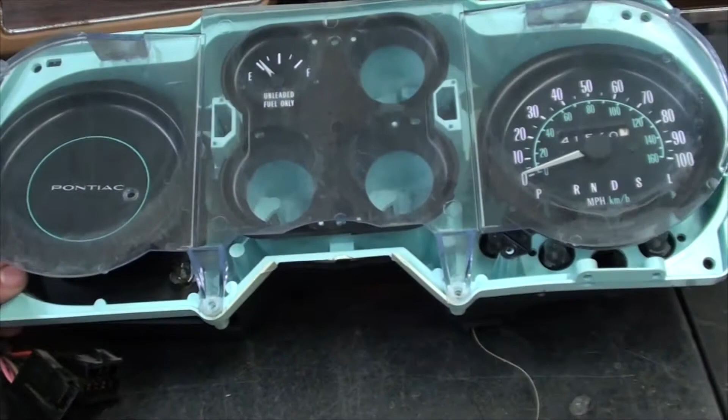Thank you. Thank you for being difficult.

So the speedometer works fine, and I kind of wanted to keep a stock gauge arrangement going on in this thing. I just didn't see, I don't know, I mean I know it's a pile of shit box, but I also didn't want to totally ruin the look of it, because it's a distinct era.

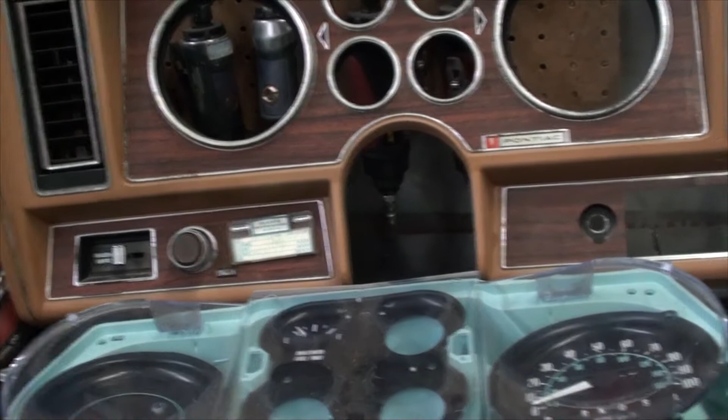So what I came up with was I was kind of hoping to find something that I could fit in here and then make the stock speedometer work, or maybe I could drill it into this guy and set it back here.

And this is 2 1/16, and it's just too big for basically anything. And then this guy's 4-inch, and they really don't make a lot of 4-inch tachometers.

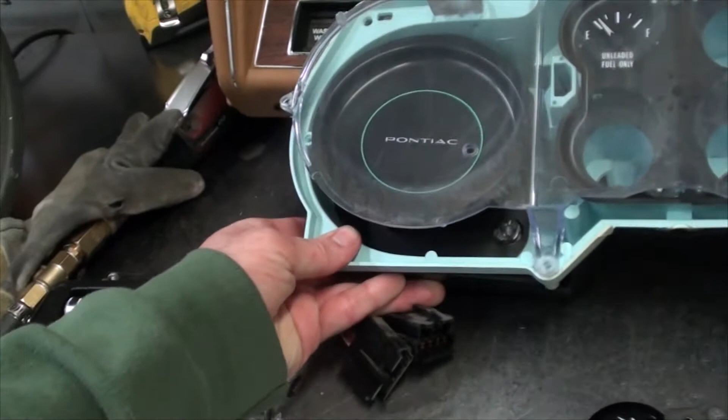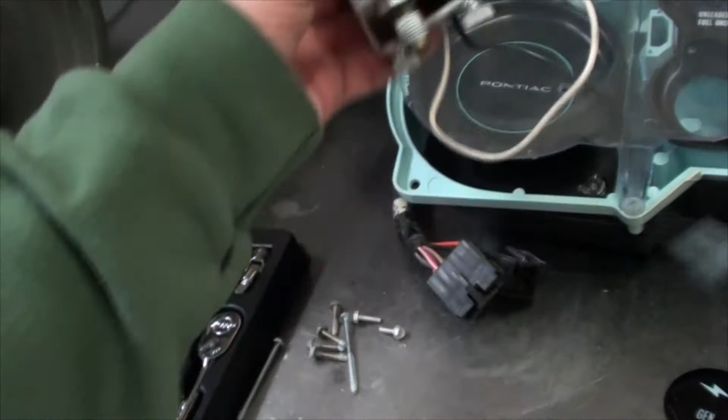So what I'm pretty much got all picked out, and in my inbox at Jegs I found one of these guys. So I'm thinking about drilling out this Pontiac and recessing a tachometer actually into the gauge cluster. So you have at least a tachometer and a speedometer, and the gas works.

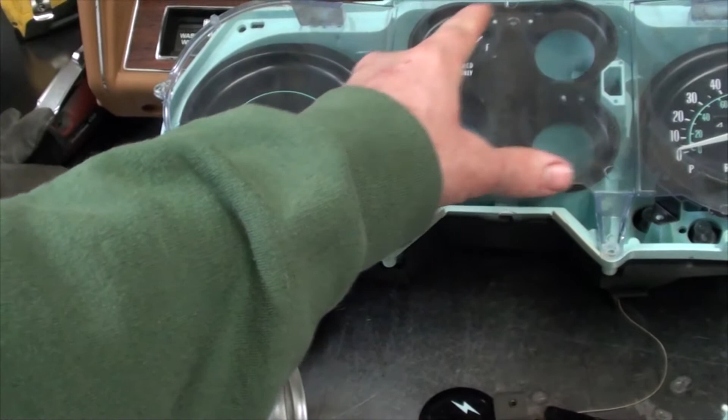So I had 3 gauges left, and these are 1.5 inches. So I found 1.5 inch water temperature, oil pressure, and a PSI gauge, 0 to I think 60. They come in, you can get 15, 60, you can go all the way to 1500, all 1.5 inches.

So I'm thinking if I can maybe get that thing to sit in there, that might be kind of a cool look to have those in there.

Unfortunately, they're all different colors. Once you get down to needing a 1.5 inch gauge, your selection is out the window. You can have these or you cannot have them. So that's where we're at, and hopefully that will work out. I'm pretty sure I'll order those and throw it in there, and that way I'll be able to retain.

I also like having my column shifter little needle thing working, and I would like it all to work because I'm greedy like that. And I think it would look cool to just retain the stock dash.

I got a Racepak gauge cluster that I could maybe 3D print and just snap in there and have all the stuff that I really want and care about on there. But I don't know, I think for a daily driver that's not going to be a crazy horsepower car, and that might be all you need to really monitor, just the engine temperature and the oil pressure.

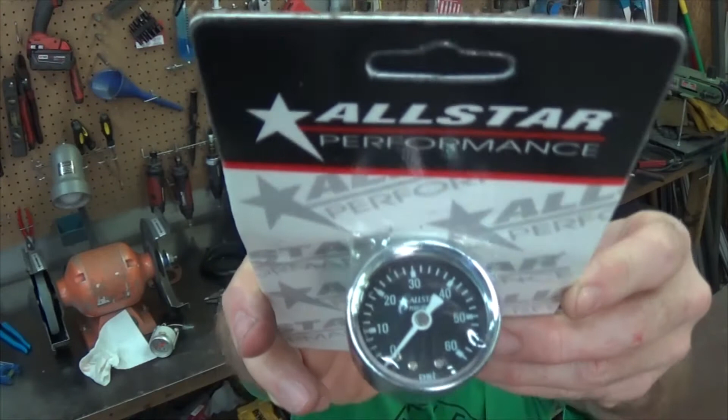So my thought was I could replace this one, this one, and this one, and then over here I got this little boost pressure. It's like a 0 to 60 gauge, a 0 to 60 PSI boost gauge, or just a pressure gauge, but it just has an NPT fitting on the back, and I got a little hose, and I can just run the hose up into there from the manifold, and it will tell me what the boost pressure is.

I bet they make boost gauges that are based off your map sensor nowadays. And I got an oil sensor, so these guys can fit into these gauges. I can leave my stock gas, my stock speedometer in place for now, and then I got this little RPM guy, and I was thinking I can just stick it over here. I wonder if I could fit the RPM and maybe my air fuel right next to each other. I don't know if there's going to be enough room for that. Wow, this guy's little, it's thin. Look at that, this is the AEM. Look how thin that is.

I think what I can do is cut out a piece of aluminum and kind of Dremel out what I don't need of this plastic shielding on the inside, because there's enough room here that these guys can fit. Maybe. Maybe I'm lying to myself, telling myself stories. Ah, damn it.

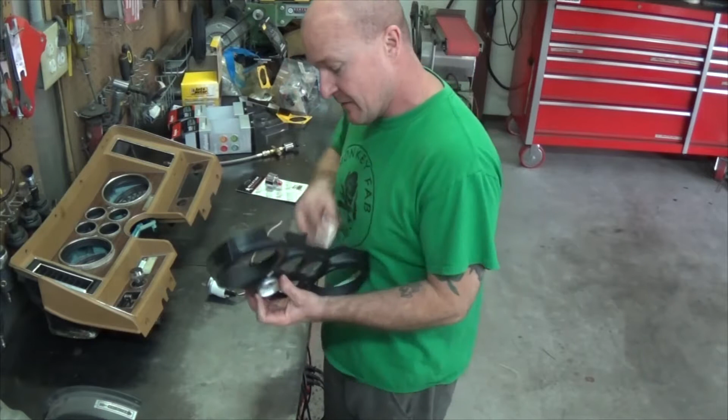So I think water temperature on top, is that the most important, or is it oil pressure? I'll put water temperature on the top. I don't think we have to worry about the order of precedence.

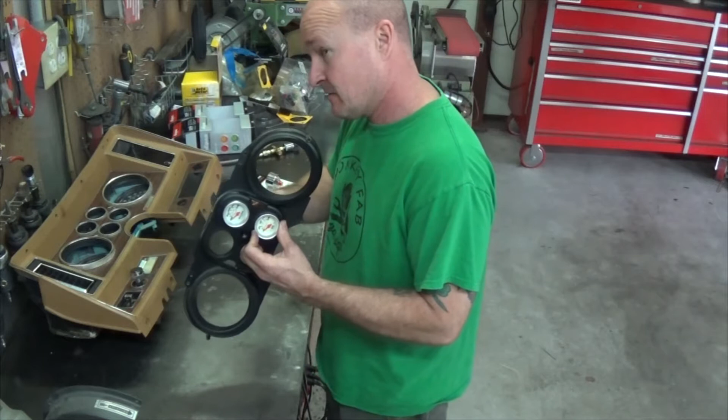Yep, we got PSIs. There is definitely PSIs. I'm getting to the age where I've completely lost my mind.

So here's my fancy idea to hold this guy in place. Damn it. Everything was going so well.

2 inches. So let's see what we got. Trying to make it look nice.

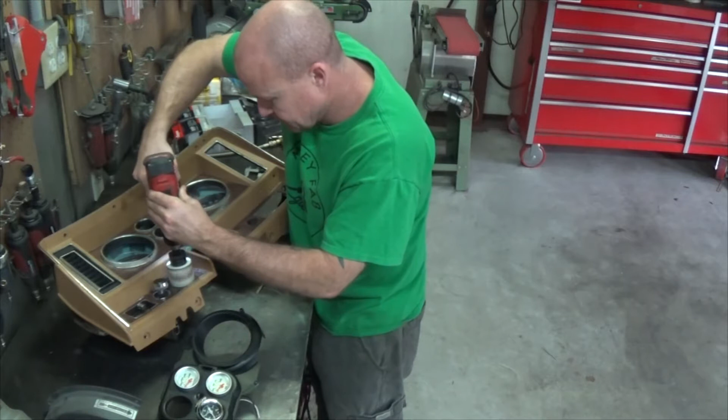Alright, so this guy, we're thinking like here, hey, that looks like it might work. And this, we can fit on, there's a nice good... there's some shit in the way. So there's a little dilly on the back, just gotta get rid of that.

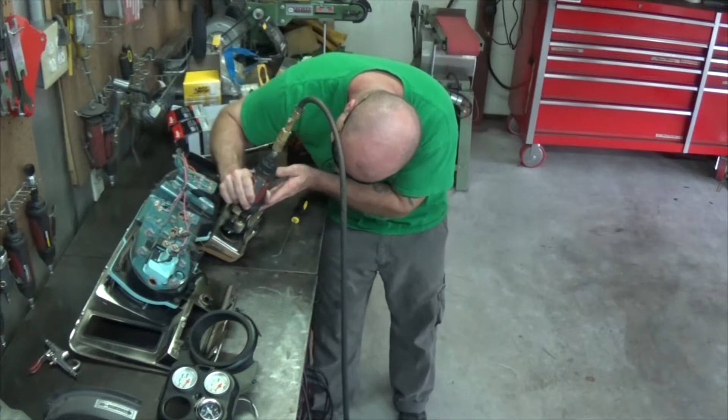Just like arts and crafts. I got some metal on my finger now. It feels great. If it ain't one thing, it's a motherfucking another.

Now we're just gonna... this is an odd little mechanism. This is your... can you see that? Doubt it. Okay, watch. That's your parking selector indicator thingy. And I almost broke the dash. I felt it go crack.

Okay, so we are gonna take this guy apart so we can see if this will fit the way this is, which I think it looks like it will. And then if that works, what we're going to do is figure out how to get the air fuel and the tachometer over here and see what we got to do. See what the haps is on the rest of this stuff.

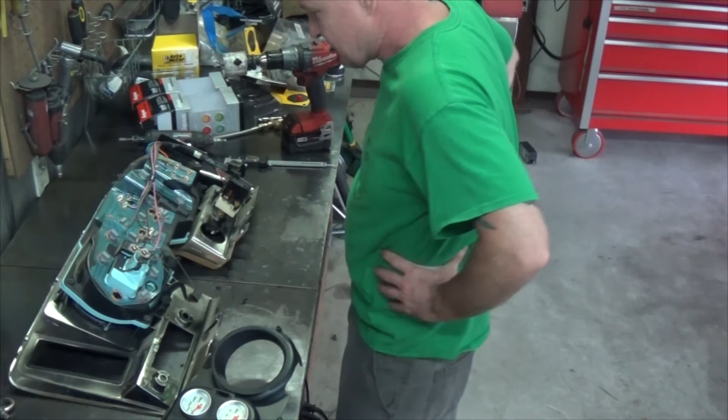It looks like I got power lines, but I'm not really sure how they're powered, if it's just all powered. I see a red wire. It would be nice if we can just tie the wires right into the main loom here.

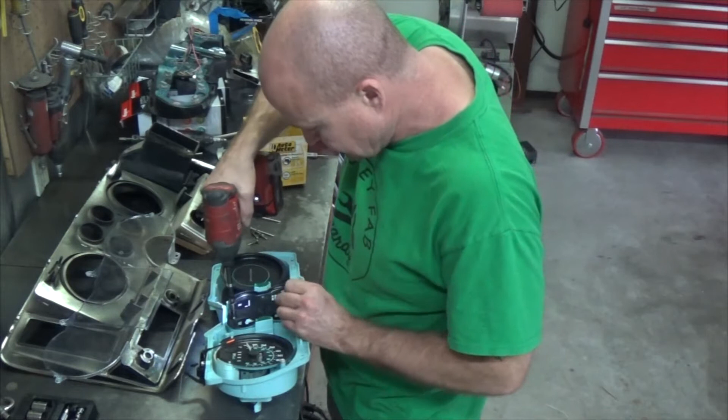How fucking sweet is that, man? That's like... I feel like one of those Mexican soccer players.

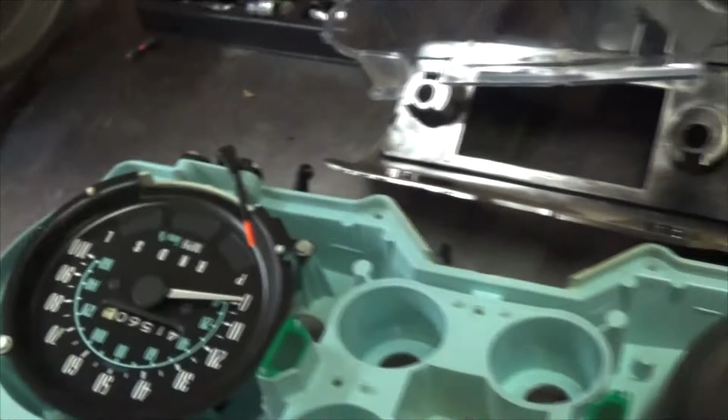Goal! So hopefully this will just drop in there and I won't have to fuss with anything. Like a Mexican soccer player. Whoops, got upside down. Please just fit.

Turn signal indicators are falling all over the place. We'll just take them out for right now, and we'll do this. There, back into there, just fit. Just be nice, just work with me a little bit. I've been trying to bring you back to life.

Fit, no fit. Does it fit? Fit, no fit.

It's hitting on these stupid screw covers. I was thinking if I could just trim these down. Oh, well that makes perfect sense. We'll throw them at the very bottom. Okay, well, whatever.

Because I really don't need any of that, so I think I'm just gonna obliterate it. I'm gonna kill it. That's what I'm gonna do. Which instrument of death do we want to use? Probably one that's not gonna hurt us too bad.

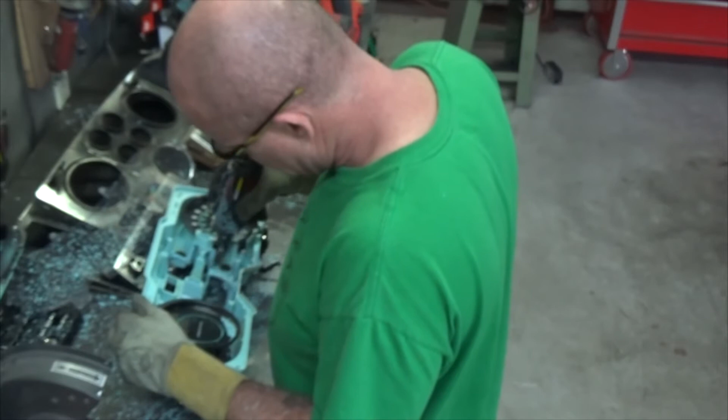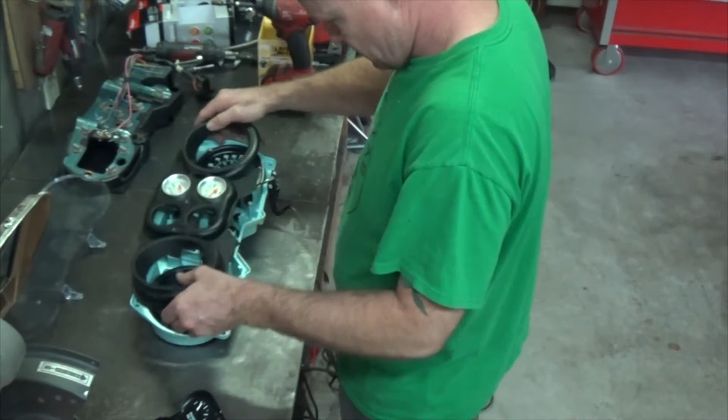Let's try it. Let's give it a shot now.

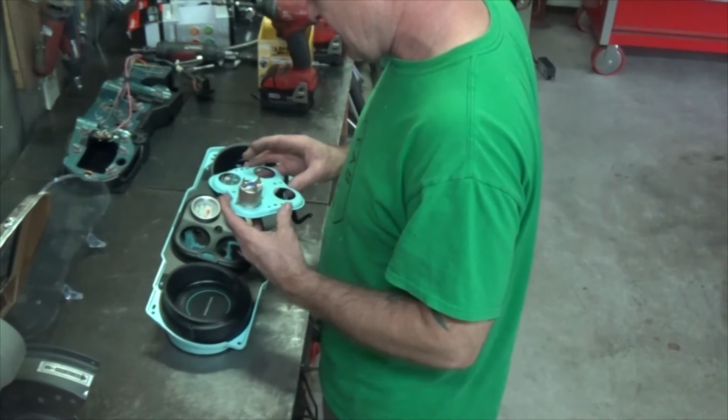Alright, so we just need to figure out how to get the gas gauge in. So there's 2 points for it, so that should keep it in there, if I can. You got that too, huh? I'll get it there.

So, alright, so we just gotta cut this here so we have room for our gauges. So I think I'm gonna just try to wing it like this. We'll see, we'll see what happens. Thick bandsaw.

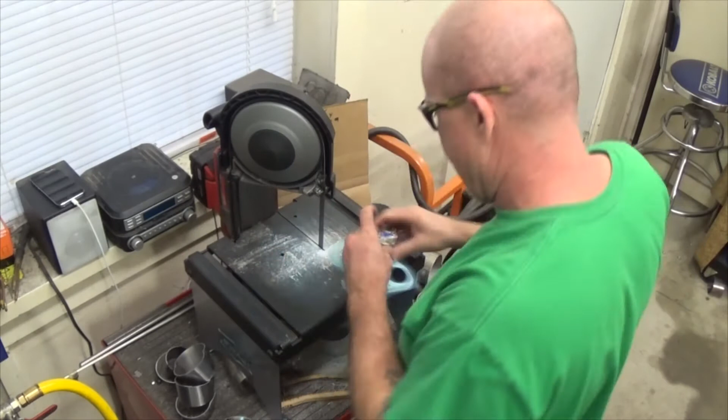Bottom. Yeah, so just put one in there. Who cares? Right? Right, this guy.

Why did he put wires on gauges? Alright, man, it's not exactly OEM, but it's not shit. It's not complete shit either.

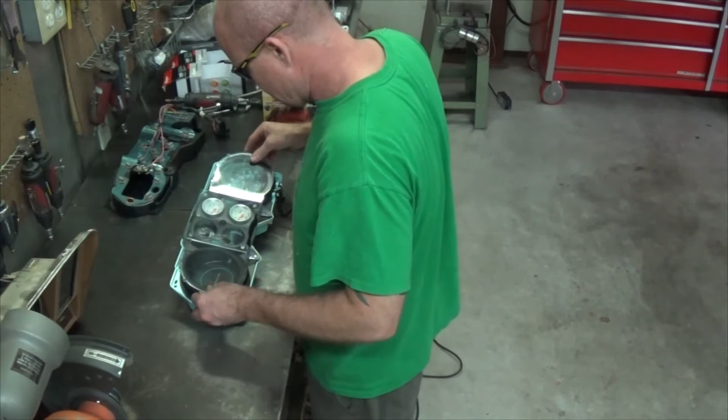It's gonna work, boys. It's gonna work. Oh yeah, that'll work, yeah. Okay, cool, alright, so I didn't totally fuck us.

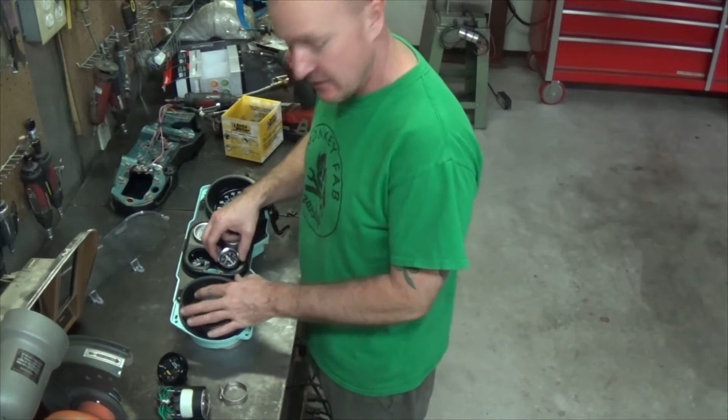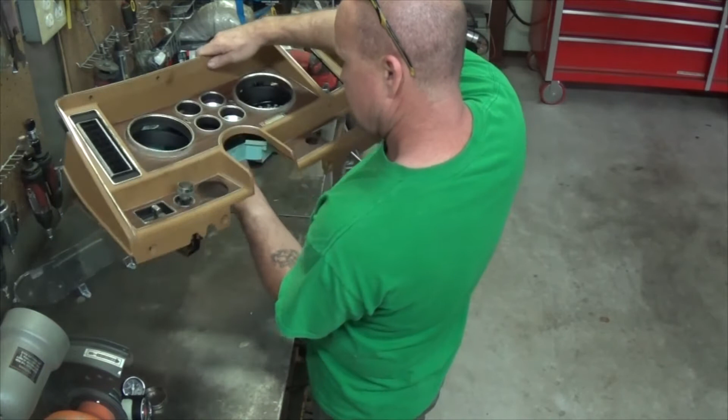What we'll do is make a little aluminum bezel that goes around here, and this will fit into. The same thing we're doing over here. And when this dash drops on top of it, it looks like these guys are going to kind of cover that up anyway. So, to a certain extent, it doesn't really... nothing really matters.

Nothing really matters to me.

Okay, so we just gotta measure this shit out.

Yeah, like this, I think like that. Swap them over. This has select and mode, that way we'll still have access to those buttons. And yeah, we'll figure it out. We will figure it out.

So I'm gonna make a circle. I need to know how big of a circle I need to make, and I'll write it down, that way I won't have to measure it 6 times because I forgot.

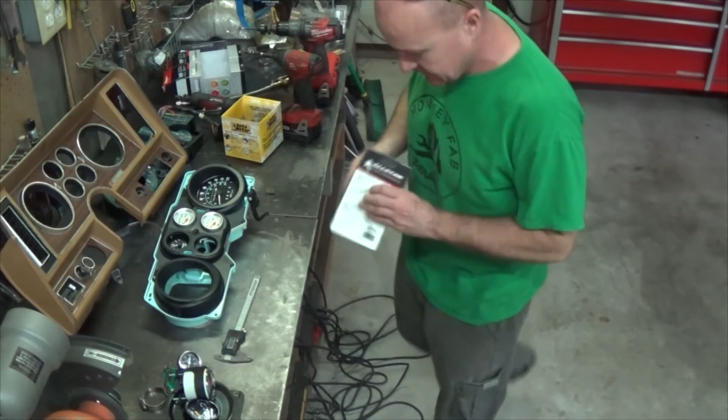So this is PSI, and this we'll call tach.

So we're going to say 1.6... 1.600 thou ID, and then the OD we're going to make so it will sit on top of, now 2 inches, 2.00 OD. Alright.

And then on these guys, I think we'll just set it up kind of 45 like this. And that should, there's nothing in there, so it should work. I don't know, I think this is just plastic, so we should be able to carve that out pretty easily. We just need to know what this is.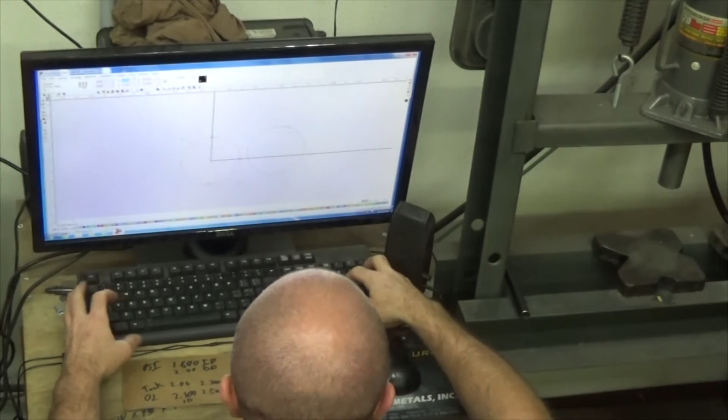Let's call it 5 inches on a 5-inch ring. We will choose a circle and put it here, then do a copy and paste, and get the sizing right. So the inside is 1.600, and the outside is going to be 2.00, or 2 inches.

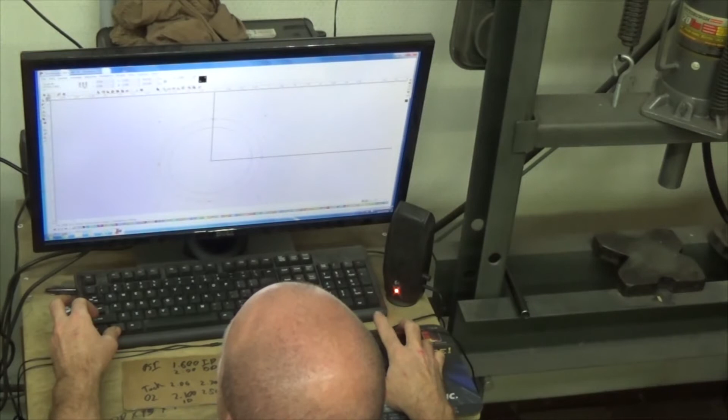So that's great, we'll add some tool paths to this. We'll make this one a mill tool path, and see my lead-ins at 45 - let's do a little more lead-in than that. Okay, that's good. And then this guy we'll make a female tool path, and give ourselves a little more lead-in - that's fine. We'll hit OK, and then we've got to get rid of our geometry.

We're left with tool paths. We've got to sequence these, make sure they're sequenced correctly - that is first and that is last. That will work, and then we just export. Where the hell do I export these things to? Let's go.

Block off plates - sure, we'll call it block off plate. We'll say the 2-inch, PSI, and save.

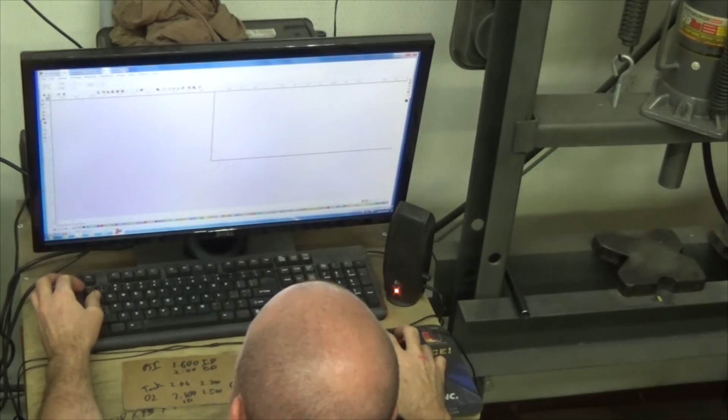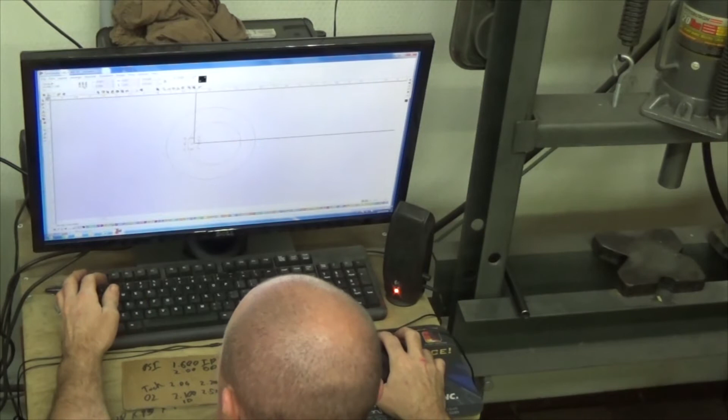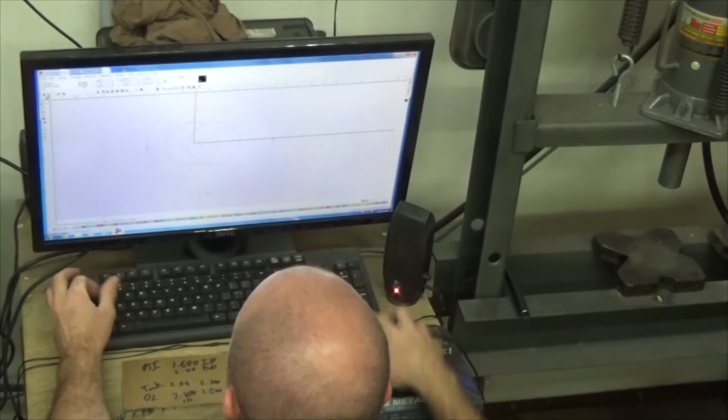Okay, so that one's good. The next one we'll just reuse this and open up some more geometry, and that should be good. Hit OK - whoops, don't need you, little circle. So our O2 needs to be 2.1, so we'll make this 2.100, and this needs to be 206, so 2.06, great. And then this guy is going to be 5 inches. Why are we having such a difficult time today, Mike? 5, enter. Okay, so now we just got to nest this stuff up.

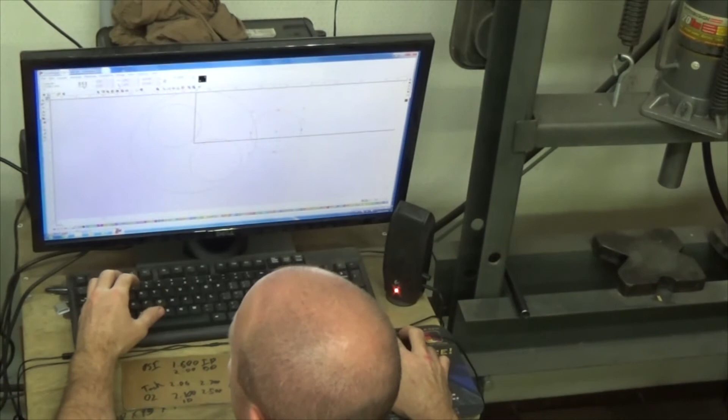Actually, what I need to do - let me just do this real quick. This is my O2, this is my tach. What I wanted to do was control-copy, control-paste, and let's make the outside of the tach 2300, so we'll say 2.3, and we'll make another one - this was 2500, so we'll change this to 2.5. And then what I need to do is nest these guys together, because this is the inside.

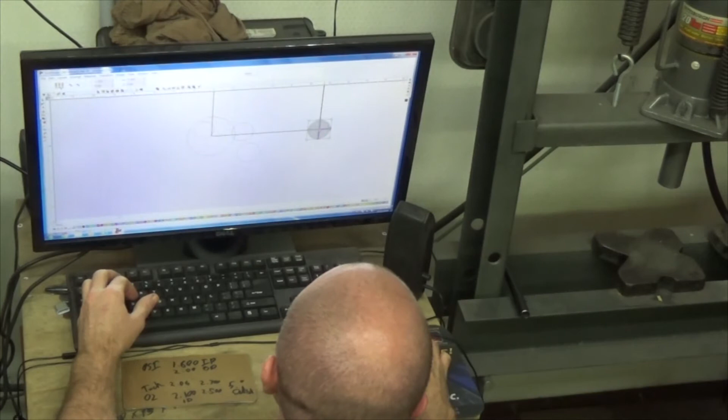That's the actual cut I need to make, but this includes the bezel area. So we'll just group those to keep it simple. I'll throw that there. And then this is the outside of the tachometer and the inside - so we need to actually cut the hole on the inside, but we need to account for the material on the outside so we don't bump into each other. And then we need to keep them nested towards the center.

Oh, you know what, I was going to do the tachometer on top - that's right, because it has little buttons. So let's switch this up, put this down here, put this up here.

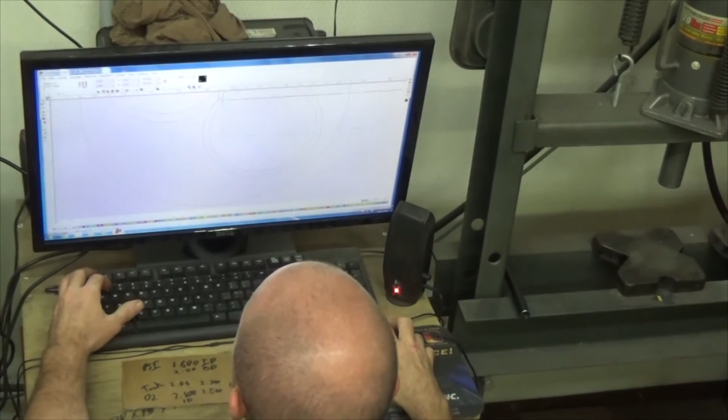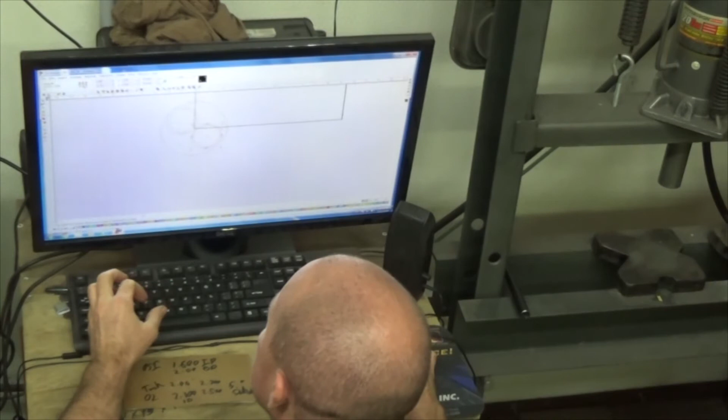See, right here we're hitting, and we're outside of our circle as well. So let's just move stuff around a little bit, see what we can do. And that is not horrible - it's not horrible. So we don't need these guys, so we'll get rid of those. Let's ungroup them, you two. And then we can get rid of these guys, bye and bye - and there we go. So that's what we're going to cut out on our drill.

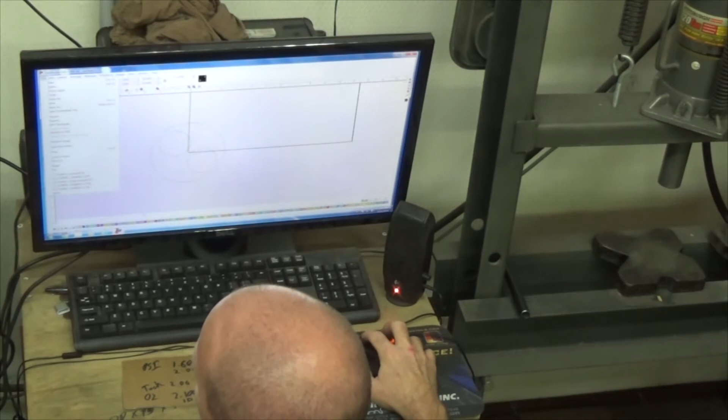I should scribe something on there - like, should I do a monkey? I think like a little Monkey Farm on the dash would be cool. That'd be kind of cool. I think it'd be cool. Let's do that. Let's go file, open.

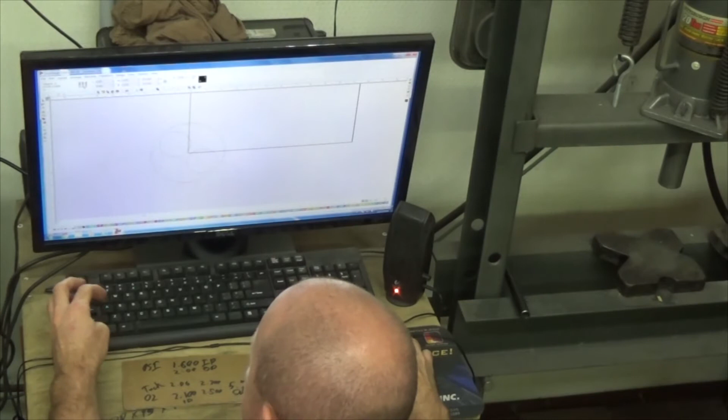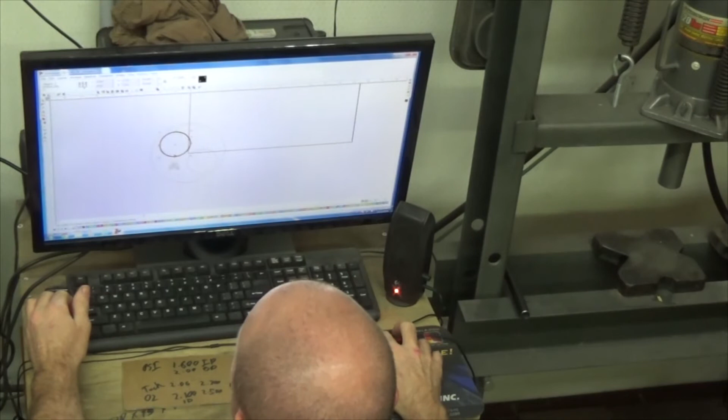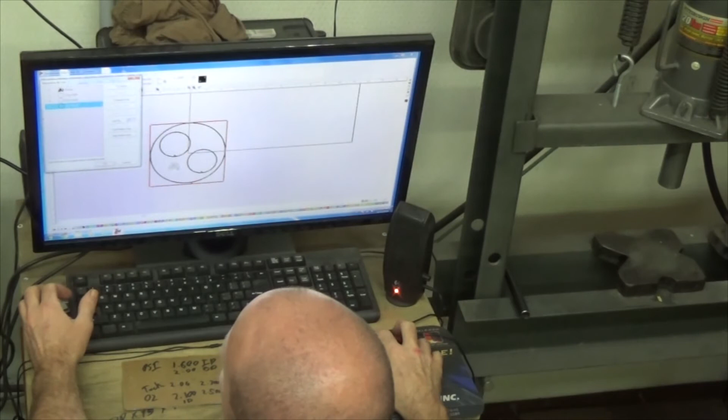Cool, so we'll add these toolpaths. We'll make this a female, we'll make this a female, and we'll make this one a male. And then we've got to get rid of our geometry, and then we've got to sequence it. Sequence by list - let's make that first. Okay, great. And file, export.

It sounds much nicer in person, I assure you. I assure you, it's so pleasant.

Alright, and cut it, okay, and start - do plasma cutter, thanks.

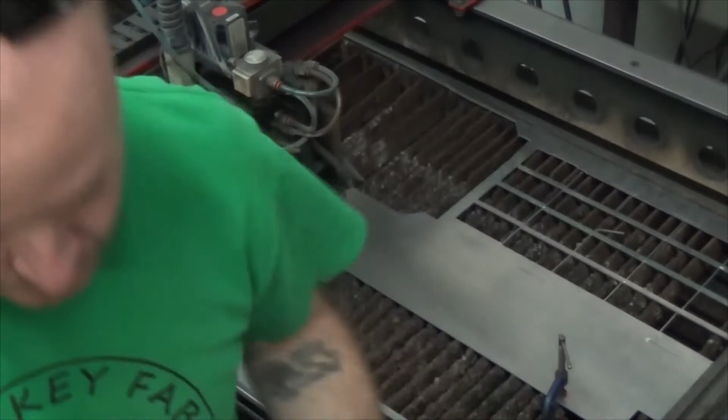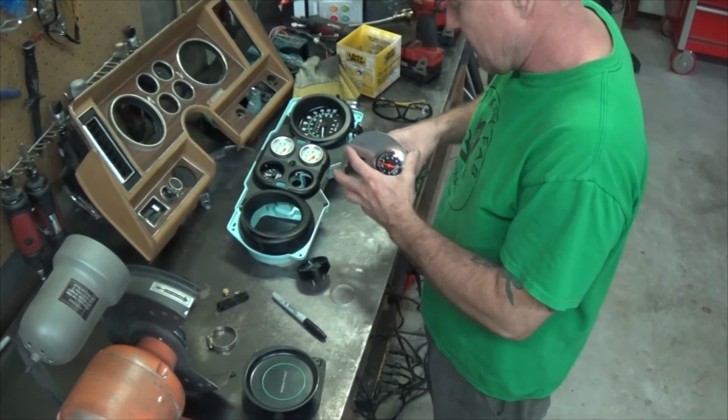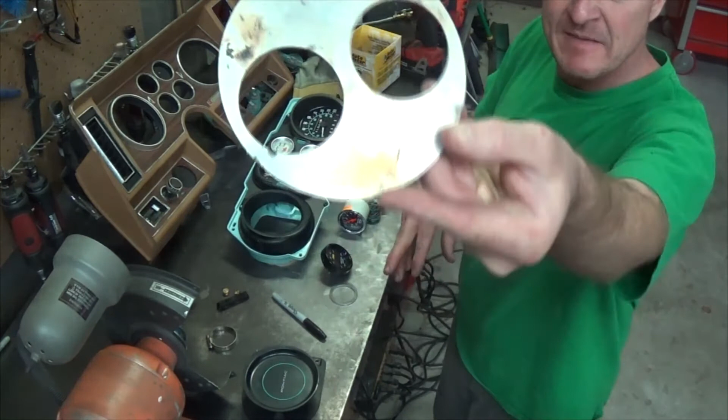Pretty cool - what they claim to cut, what do you call it, the tolerance - the tolerance is always off just a hair. So that guy will probably not be a big problem to fit at all, and that guy's going right in too, so that's good. And what we'll do is, whenever you plasma cut it always makes kind of a disgusting mess, so we'll just clean this thing up a bit, and we'll cleanse this guy out a little bit, and clean it up and paint it, so it kind of matches the same black motif that's going on.

Right around - now what I do have to do is figure out how I'm going to hold this guy in here, and I'm hoping that this plastic cover over the top will just kind of mash it down.

Yeah, I think so. So what I can probably get away with is just gluing this thing onto there and putting that cover there to kind of hold it down, and we'll make it happen.

It's been hours, probably 4 or 5 hours now, I'm guessing, since I last had this camera on, and this is kind of where I'm at present.

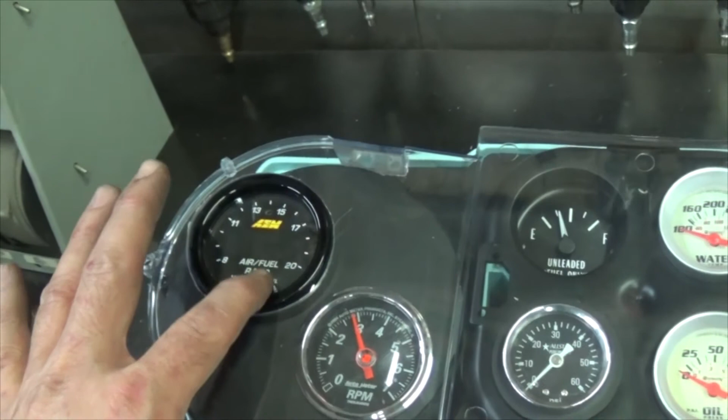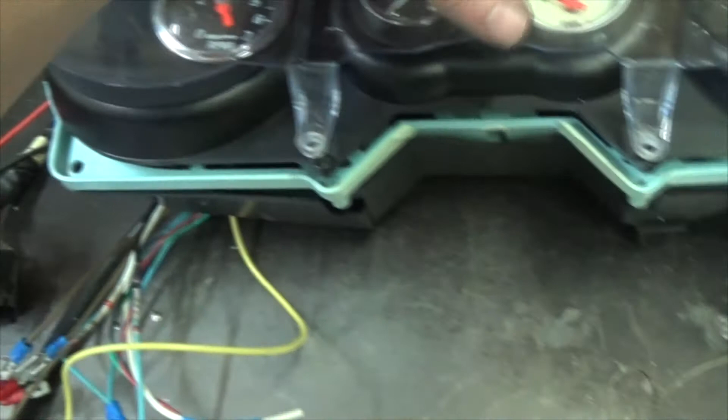We got all the gauges situated in the stock gauge pod the best we could. This one ended up sticking out a lot farther than I intended, which is fine because it has little buttons on it. I don't know what the hell they do. I cut it out with the hole saw, then did some clearancing with the aluminum tipped die grinder, and it fits okay. It's not perfect, but it's gonna work.

I got all the wires ran for the most part. One problem I'm running into is the air fuel plug. There are just two plugs in the back, and I don't want to cut the loom halfway down and splice it all together. I'd rather just plug it together. So I'm wondering how I'm going to do it. I have to assemble this whole thing, and I wonder if I can get it assembled in the car, plug that in, and then do the rest.

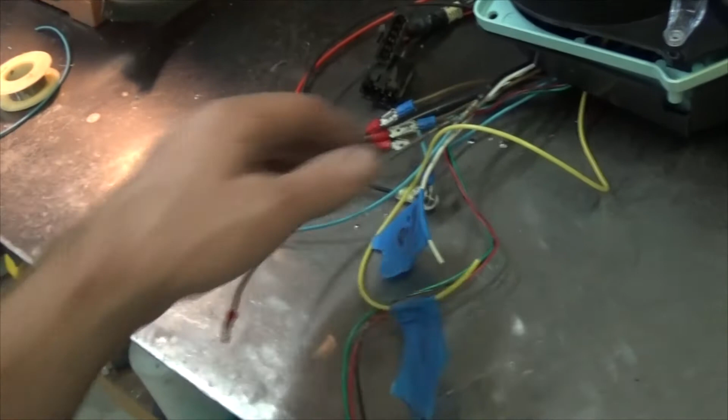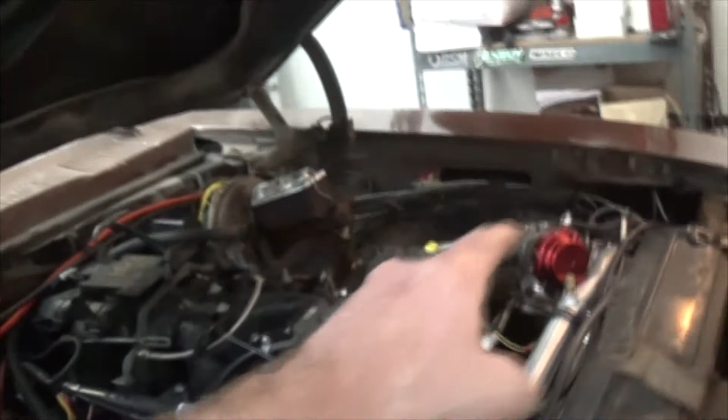Most of the wires for all the other stuff are out, and that's not too bad. I got that sorted, and I got the little boost hose guy, and I ran all the wires to all the sensors, the temperature sensor, the oil pressure sensor down the fender. I ran the hose for the throttle body for the boost gauge and for the blow-off valve, and I ran the wiring for the fuel pressure sensor.

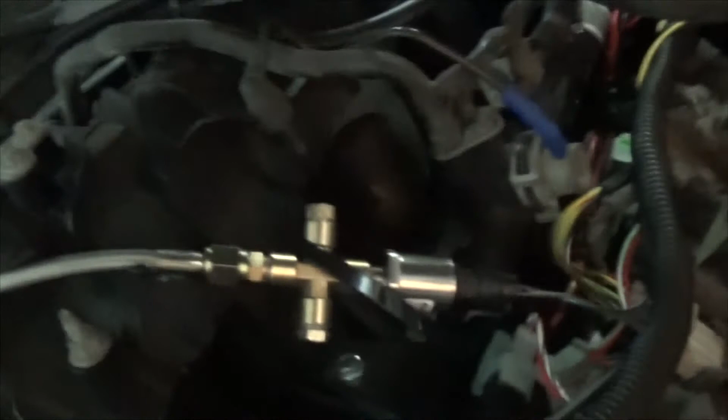I found an AN4 line that I had laying around, took the Schrader valve out of that, and found this really goofy T-fitting that worked. I plugged the two ends I didn't need, ran it around and zip tied it, and ran that into there. And then the air fuel gauge.

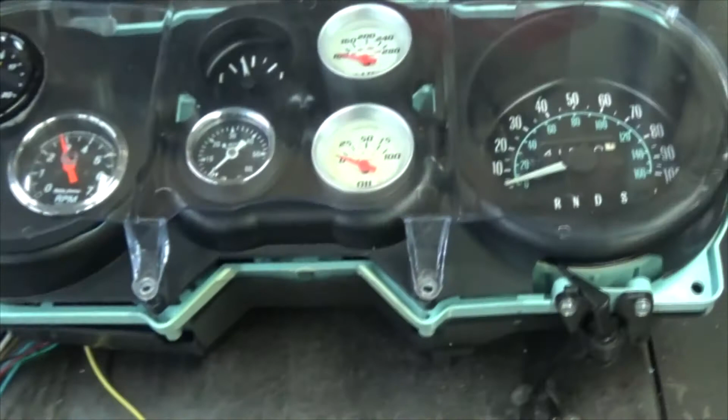So I should have a pretty good complement of gauges. I think I went from having basically a speedometer, an odometer, and a gas gauge. The inside of the car is just an absolute disaster, and my light's dead, but it's just a pile of wires down there, not really fun. But I went from having just a speedometer and a gas gauge to now having coolant, oil, boost, air fuel, the tach, and I'll also have a fuel pressure gauge. I think that covers most of the gauges I like to see.

So I'll be pretty happy with that. It's a little wonky, but not horrible. I could have done a lot worse. So that's where I'm at. It's late, I'm tired, and I'm gonna call it a night. This is the current situation.

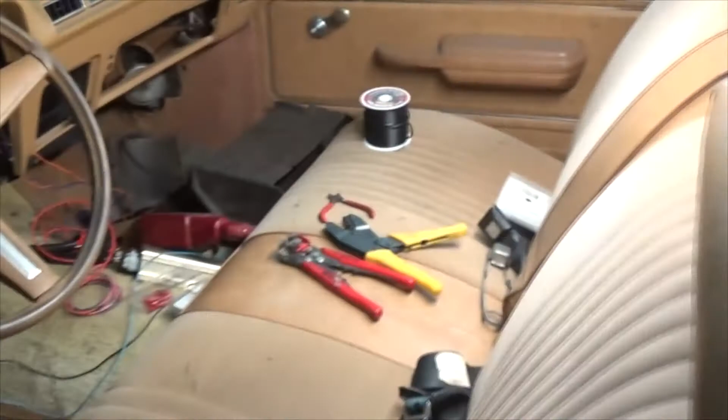We got all the sensors ran through the firewall, and all the harnesses kind of pre-staged where I need them to be.

I bought a 6 fuse block and ran it to my switch with 10 gauge wire, so now I can use that to run a few different things. I'm going to use it for my fuel pump, I'll have a remote fuel pump shut off, the computer, and then all the gauges of course. So it's a bit spaghetti-ish.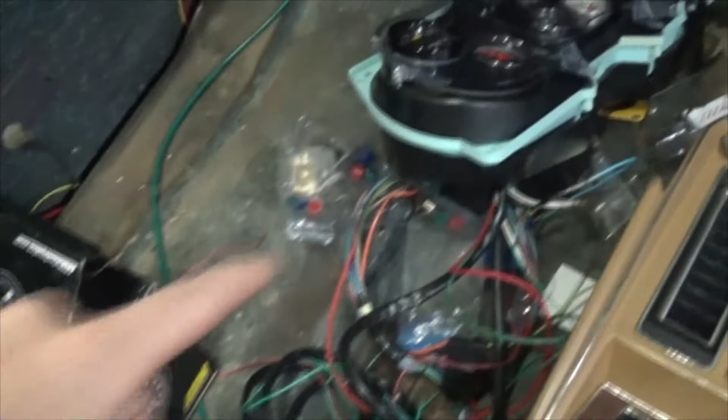But what are you gonna do, right? Let's look at this junk in the trunk. We got this guy all kind of ready to go. So all the wires again are ran, I pre-ran the hoses for the boost gauge, and I've just got to marry the two at this point.

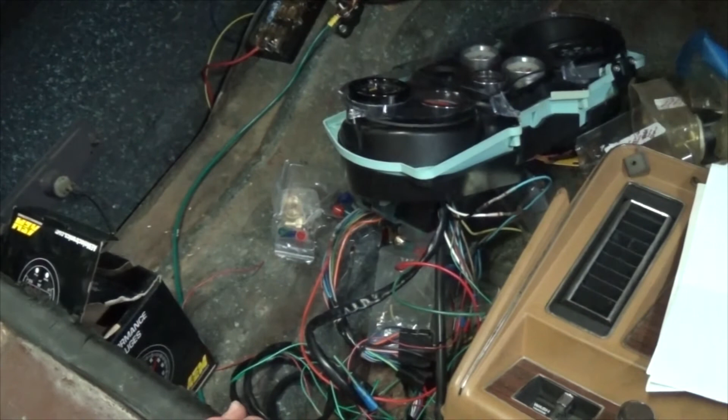Not super motivated, it's not a motivated day. It's a Sunday, and I mostly worked doing monkey fab stuff all day, making collectors and stuff. But yeah, that's where we're at, and we're gonna get ourselves motivated and make something happen.

Give me this. Give me this.

What you got, Blue? That dog loves his stick. It's all about that stick. So we got old Ticky Tick running.

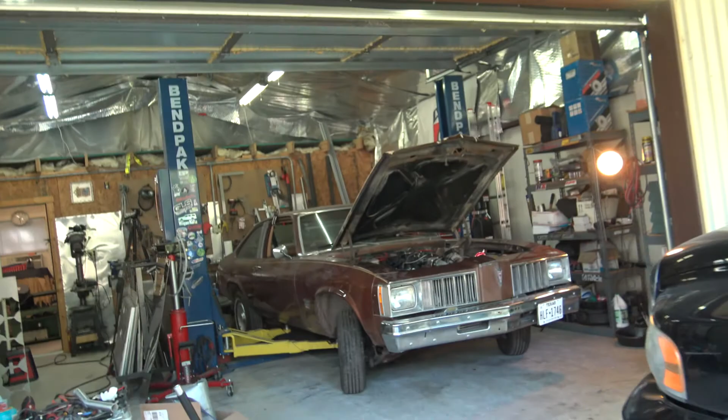I went ahead and built just a dump pipe right now, and it kind of rolls down through there, and eventually I think it'll go back underneath the A-frame and meet up with the exhaust and get recycled. All the heat wraps are burning off, nice and smoky. I got a little whine going on with the power steering. And then here's my ticky tick.

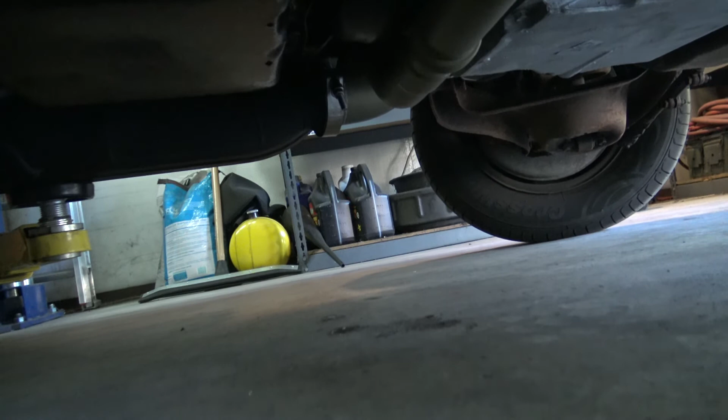Let me adjust my microphone, hopefully you guys can hear it. So you come in here, you look around, you think maybe it's the belt. But then you come down here and you hear it totally in the converter. Something's going on with that. Can't really tell if it's making turbo noises or not. It's kind of loud.

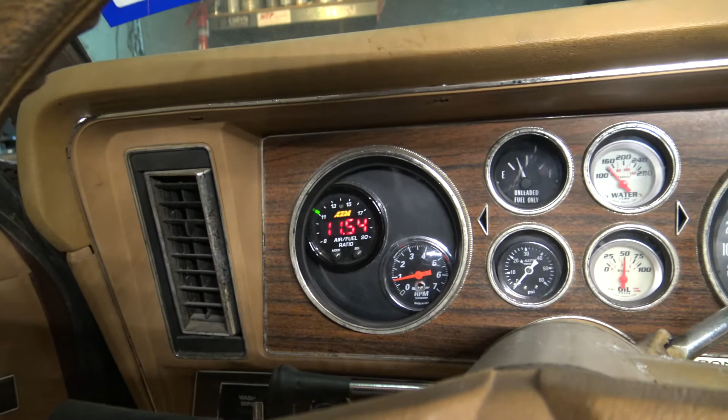And we got the gauges working, so we're running pretty rich, which you can smell. And the water temp gauge is kind of working, the oil pressure. So yeah, everything looks like it's good. I think I'm gonna try to load a tune in it and take it around the block, see what happens.

Hey, look, it's no longer in the garage. I actually took it out. Look, I got my Team Baby Soft t-shirt on for you, Cameron, for you sexy guy.

Heart attack. So yeah, I took it down the street, and whenever I tapped the brakes, the fuel pump started screaming at me. It's been running a while, and I don't remember how much gas I had in it. I know it was definitely an empty tank when I welded the sump on. So I don't know how much fuel it's got in there. I think that needs to be taken care of.

I hope that's the only problem, because God knows there's plenty of other problems. It doesn't feel like there's much power. The air fuel ratios are way off. I need to go ahead and sort through the computer stuff, and I'll figure that out.

It's on the road now, at least running, and we can get it registered. So yeah man, she's a sexy beast. Look at that, the hubcaps I just took off. I still have the hubcaps. Don't you worry, don't you worry none.